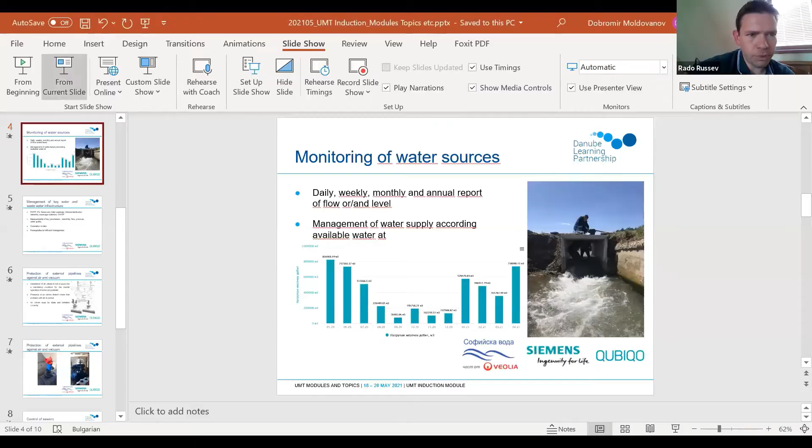As I said just 5 minutes ago, I will try to follow the initial agenda of the module. But what I want to add are several important topics which I believe should be deeply discussed in that module. The first of those subjects is monitoring of water sources.

What I started to explain as an example of why it is so important to monitor and control water sources is a fresh example from Bulgaria, district of Pernik. This is an area with about 100,000 people population, and last year we had a dramatic water regime there, with people threatened by complete water stoppage.

The only single reason for this is that the water operator did not control their water source in a smart way. I'm not saying that if the water operator controlled the water source more smartly, the water crisis wouldn't happen. What I'm saying is that they would control the crisis much better, and the people wouldn't suffer so much if the water operator controlled the source in a better way.

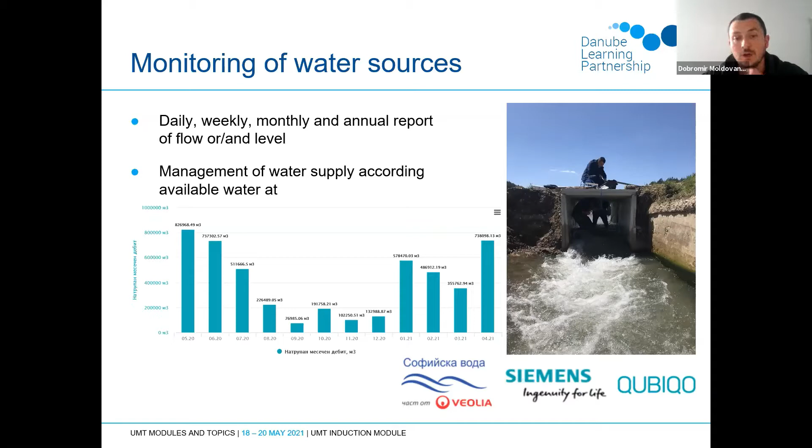Another subject which I would like to add to the agenda of the training program is what I call management of key water and wastewater infrastructure. What I would like to share with you here is that exploitation is not just opening and closing of valves and dealing with emergency repairs. Exploitation is provision of conditions for normal operation of the overall water supply and sewerage system and its equipment.

In that part of the training, I would like to share different good practices for management of potable water treatment plants, pumping stations, reservoirs, main pipelines, internal distribution systems and networks, sewerage collectors, and wastewater treatment plants. We will talk about different technologies for measuring key parameters like electricity, flow, pressure, and water quality, about correlation of different data and taking the biggest benefit from it, and about conditions needed for efficient network management.

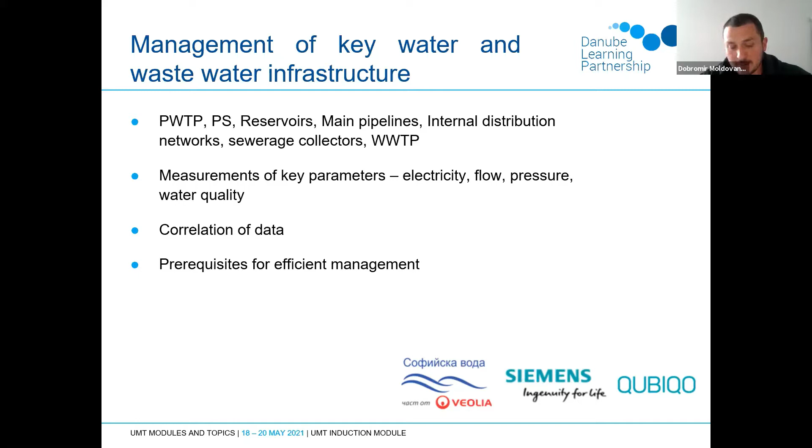Today I would just shortly talk about 2 of the subjects of this part of the training. Protection of external pipelines against air and vacuum. This is a completely underestimated subject in our region. Usually air valves are not serviced, are not selected correctly, and in total they are not installed correctly. Installation of air valves is not a luxury, but a mandatory condition for normal operation of external pipelines.

There are a lot of tools available from different producers for sizing and selecting places for installation, but no one talks about how to install air valves. Here in the picture on the right, I share with you short information developed by a professor here in Bulgaria on how to correctly install an air valve to guarantee enough space where air could be accumulated and afterwards released.

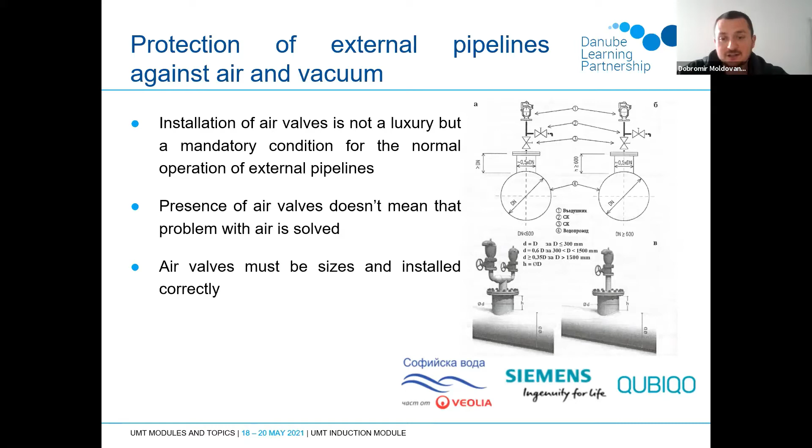What I'm trying to say is that, on one side, installation of air valves is obligatory, but on the other side, presence of an air valve doesn't mean the problem with air is solved. Air valve must be sized, and also must be installed correctly. And here I want to give a very nice example.

As part of that water crisis I was talking about earlier, our government decided to build a new pipeline from Sofia to that city which was suffering from water shortage, and I was the person responsible for pressure management of that pipeline. It comes for a DN600 pipeline with 190 meters difference in elevation.

What I'm trying to explain is that due to the improper installation of a small air valve, the system was not able to release all the pressure collected inside, and we were not able to start the DN500 pressure reducing valve for hours.

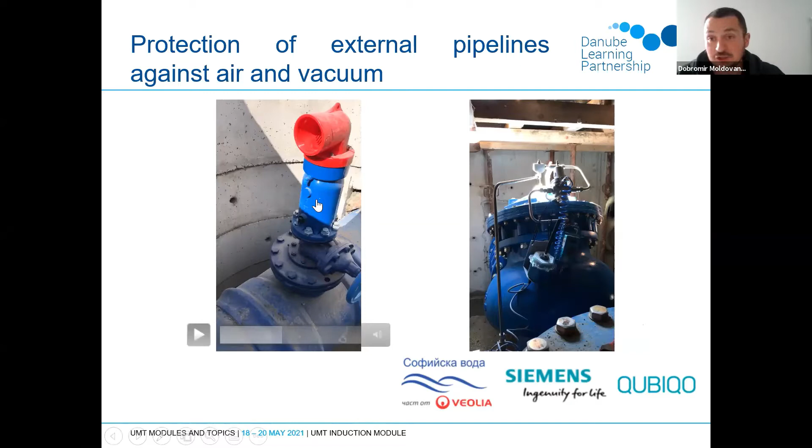This is a clear example of how something small, like an air valve — DN80 in this example — improper installation of something small can affect the overall functionality of 20 kilometers of external pipeline, with crucial importance for the water supply of the overall city.

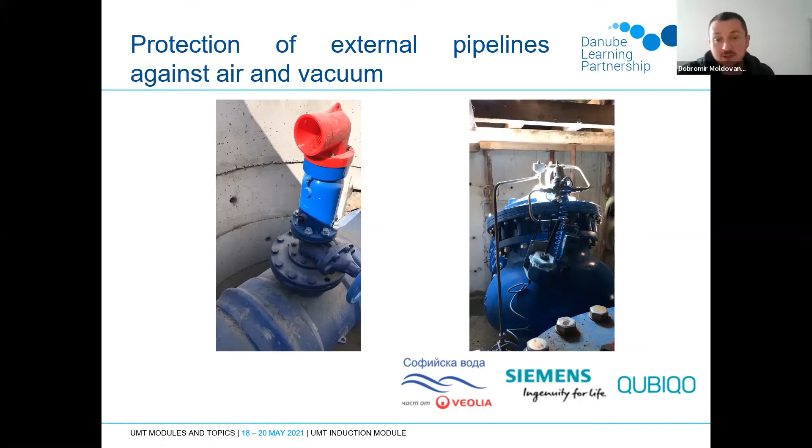We'll deeply discuss this subject during the training. I just wanted to give an example of such management of key water infrastructure. Another sub-subject of this topic is control of the sewage network.

This is something again underestimated. In our region, water operators behave as if they only have an obligation to serve the sewerage network, but at the same time, the sewerage network needs proactive maintenance in the same way as water supply networks do. In the long term, lack of proactive maintenance significantly increases the exploitation cost of wastewater treatment plants.

Two interesting subjects here: higher industrial load is not something bad if water operators are able to collect money from it and detect where it's coming from. And inflow and infiltration are not unsolved problems.

Lately, as a company, and me as a specialist, we are very active in using portable water quality samplers. We are installing this kind of equipment in the sewage network, and thanks to it, we are able to isolate sections of the network with suspicions of illegal discharge. This kind of equipment also gives us the opportunity to analyze infiltration based not only on flow measurements, but also on water quality in different time intervals.

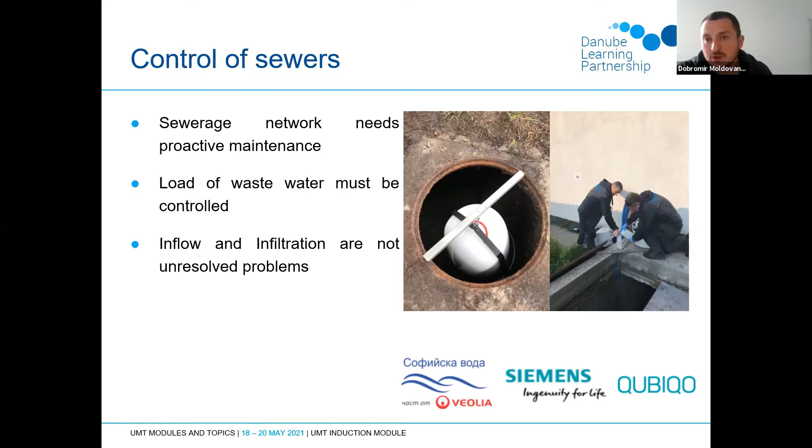And Rado, here I will stop. I just wanted to briefly present the additional subjects which I want to add to our module, and I hope that during the presentation of the overall module we'll have time to deeply discuss these problems with the participants.

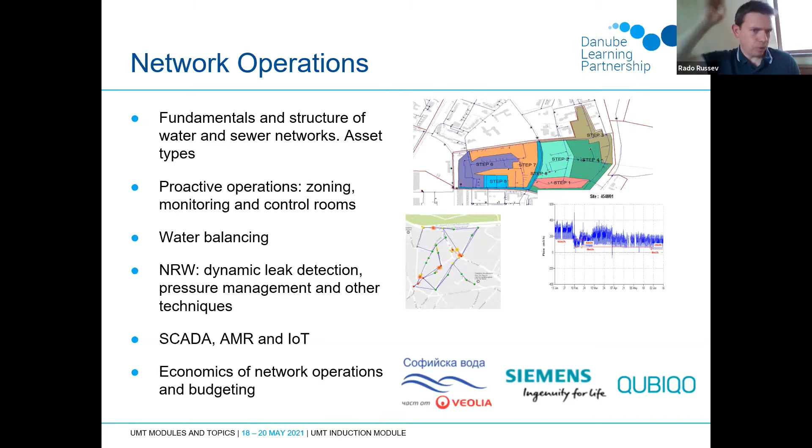What Dobry made is a very good illustration of how specific, rather technical and operational aspects can have a very deep effect on overall performance. So that's how technical topics become management issues. And this is pretty much the philosophy of our program.

Yesterday, I spent some time outlining to all of you that we are targeting a wide spectrum of topics, and only where necessary will we explore certain aspects in more detail. Dobry and Qubiqo just demonstrated an example of such topics.

We have quite a few financial people, economists, and lawyers among our participants. I hope they don't get lost on some of the slides. But pretty much that's the concept: to make sure that people with non-technical backgrounds also get exposed to the criticalities of network operations.

During this module, which will come in the beginning of 2022 — this will be the 4th module in the program — as we said yesterday, we will first cover topics like asset management and financial management, because certain key concepts will then be utilized in the rather technical modules.

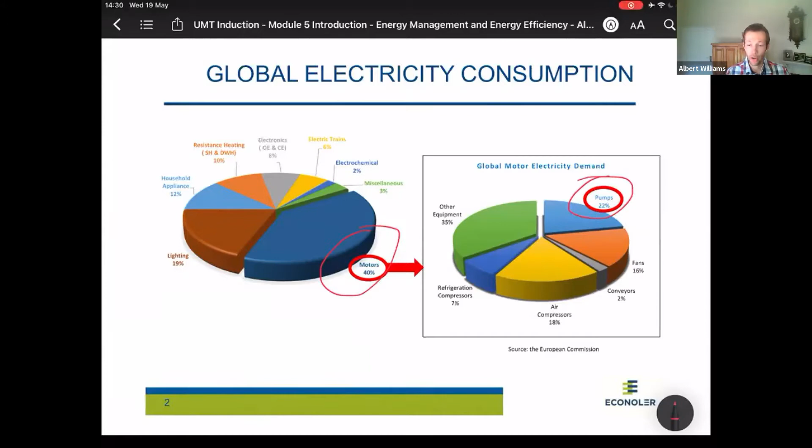To give you an overview, globally electricity is consumed across these areas. Electric motors account for 40% of all global electricity consumption. If you divide that into end-use equipment, pumps sit at 22% of that 40%. In comparison with compressed air, refrigeration compressors, conveyors and hoists, pumps are really the largest consumer of all these equipment types. That's where we will focus in this energy management water utility module.

There are some more numbers showing global energy consumption, global electricity supply, and industrial electricity supply. Motors consume two-thirds of all industrial electricity, and pumps, as on the previous slide, account for 22% of that. So we're sitting with a massive amount: 1,200 terawatt hours per year globally, which at about 10 euro cents per kilowatt hour means we are investing 150 billion euros per year in operating pumps. That's the electricity cost to operate pumps.

There was also another study mentioning that if you go into the average facility, you can save 26% in a financially feasible manner. If we apply that 26% savings on pumps across all industries, we can access 39 billion euros. So there's a lot of money available, and a lot of savings available.

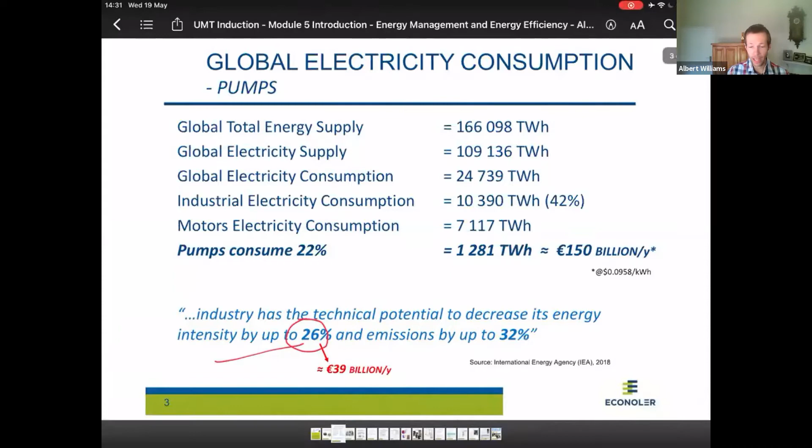So how are we going to get this money? How are we going to achieve these savings? In this module, we're going to discuss the systems approach. We're not only looking at pumps, we're looking at the entire pump system, which includes the motor driving the pump. If you look at an average motor, you might get 91% efficiency, but there's also a drive, like a variable speed drive, driving this motor.

The pump has varying ranges of efficiency, ranging between 0 and 85%, depending on how it's operated. If you only improve the motor or only the pump efficiency, you have very limited savings, maybe 3 or 5% efficiency improvement.

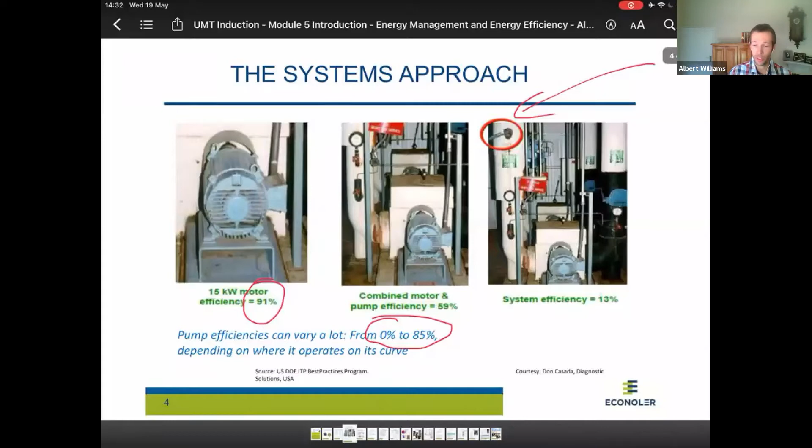But we are looking at the entire system: the piping, the distribution network, how the water is consumed, control valves, and bypass control. We are considering everything involved in pumping water from one side to the other. When you address system efficiency, that's where we get massive savings, 26% or more. I'll show you some case studies at the end where we save 40%, up to 70% savings, using this system approach.

Another way to look at the systems approach: in this example, the pump has an efficiency of 77%. We've got a motor, a drive or transmission, but here we're sitting with a control valve, and we are losing a lot of energy in that control valve.

In this top picture, we are getting a system efficiency where we're only getting 31 units out for every 100 units we're putting in. So we have a system efficiency of 31%.

Now, if we take a systems approach and take out that throttle valve, and look at how the pump is operating to only supply what is required, we can actually improve the system efficiency to 72% from 31%. It's more than double the savings.

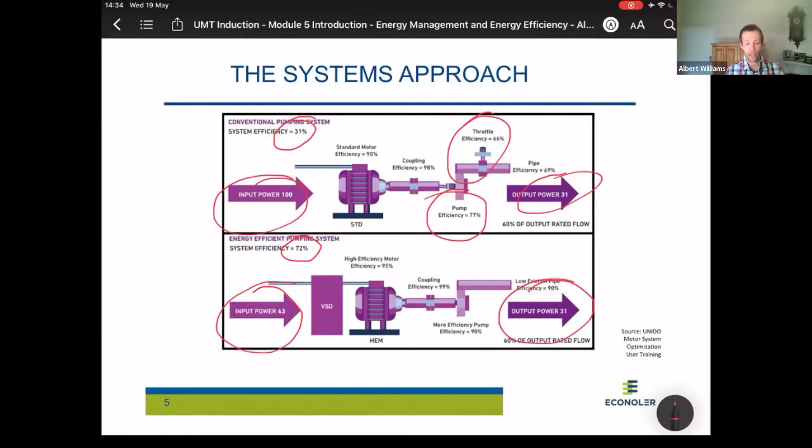So we're still getting 31 units out, but our input energy goes from 100 units down to 63 units. We need a lot less electricity to run an optimized system, and that energy that's been made available can now be used for other things. It's a virtual power station - you've created a virtual power station, and we can use this freed energy to basically improve the economy.

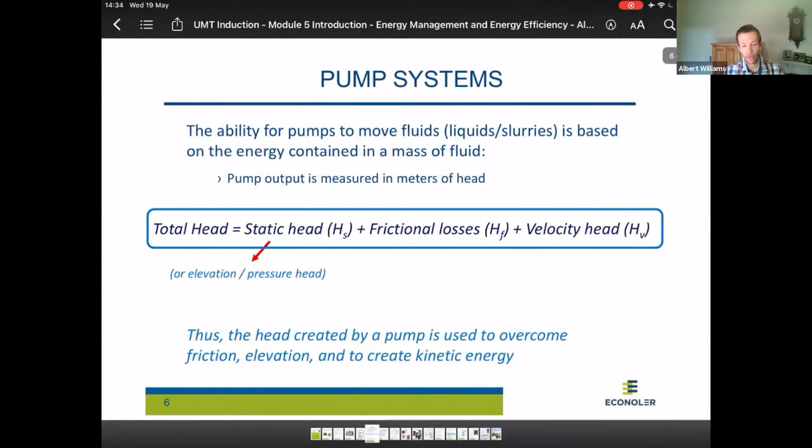With regards to the technical aspects of pump systems, we're not going to discuss this too much now, but pumps are used to move liquids or slurries in some aspects. There's three things that are important here, and we'll discuss this in the module: static head, friction head, and velocity head also, but static and frictional head or losses - that's the most important aspect.

We're going to spend a lot of time in the training course to determine these things - how does it work for your specific situation, how much static head and frictional head do you have in your system? So a pump is basically a machine that is used to overcome these losses.

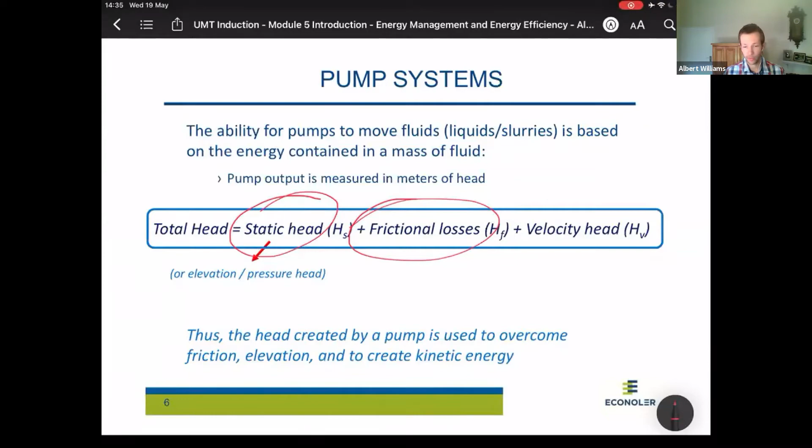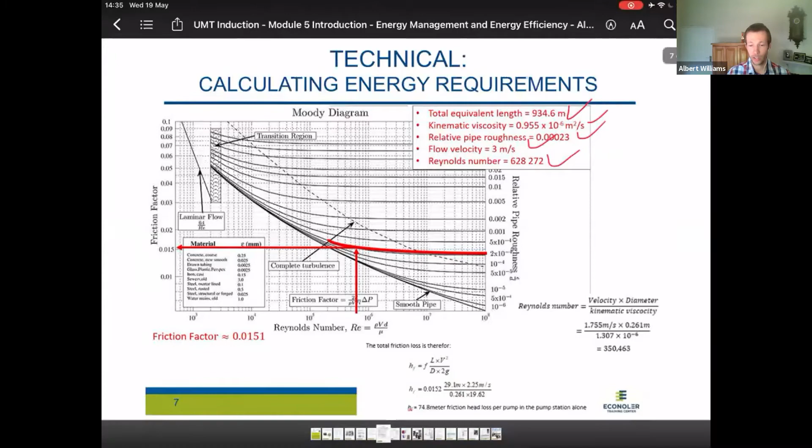It's not so that it looks complicated now, but if we go through it step by step in a sequential way, it's actually quite nice to see how much energy you are losing in your system and how to overcome those losses. We use that energy, that head requirement, and then we take that to a performance curve.

Now these pumps have performance curves, and there's also a system curve. We're going to use that head requirement to draw a system curve. Basically, we use this information to understand where the pump is operating and what we can do about that operating point - can we change that in a more efficient way?

And a lot of the time, it's a very cheap saving. Sometimes it's a zero investment cost to improve a pump's efficiency or a pump's system efficiency.

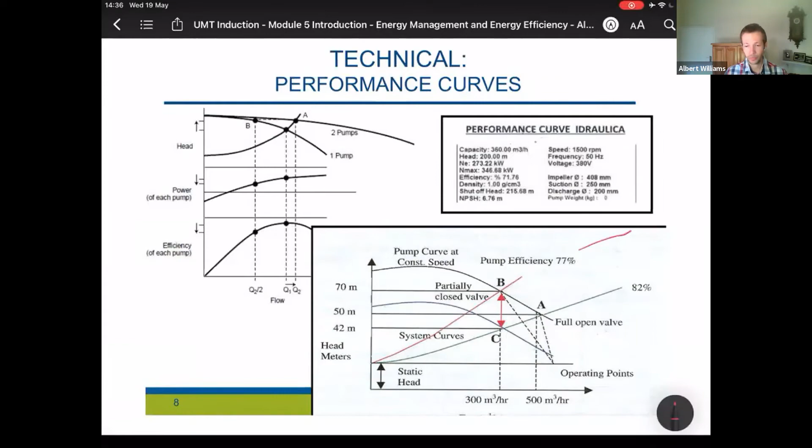In addition to energy and energy savings, we also look at maintenance, because maintenance and energy are very much interlinked. If your pump is operating incorrectly, you get all sorts of problems with these impellers. We call this cavitation, which is very common. Now, what is causing cavitation? How can we solve this?

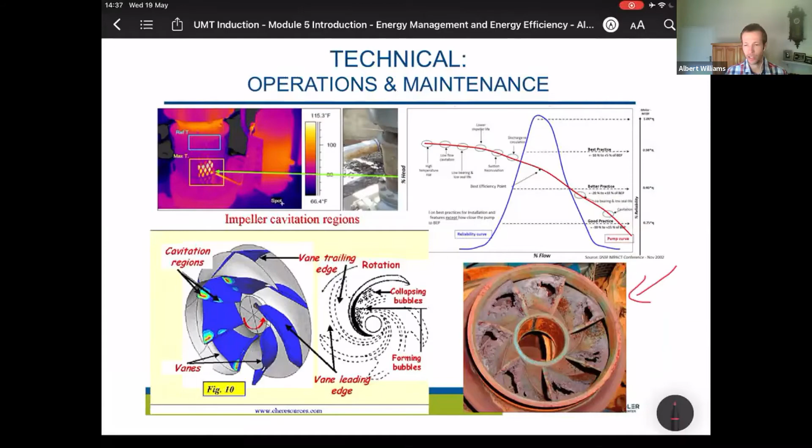Things like your shaft alignment - we're going to look at that. Your bearings, heat, and how that has an influence on your motor. We are trying to keep the pump operating in a certain efficient way so that we do not have these maintenance aspects or these breakages that happen. That is a big headache in most pump systems.

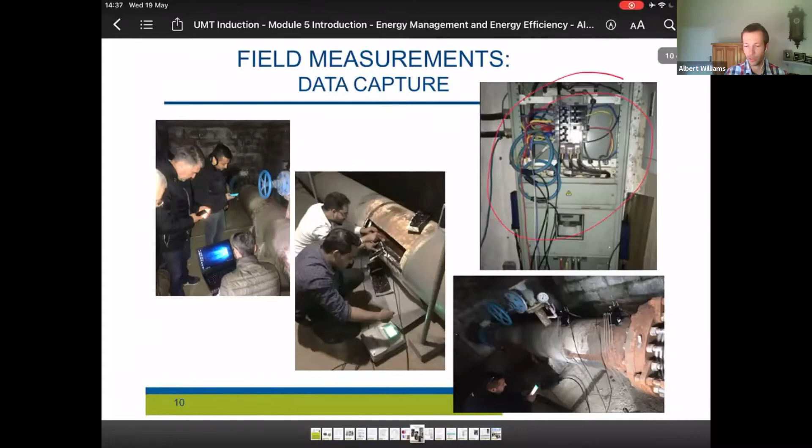So we use all of these parameters to determine what is the kilowatt requirement of this pump and what is the system requirement of this pump. So we need to have data so that we understand what's happening and how to improve the system. It's quite a fun exercise to go out in the facility.

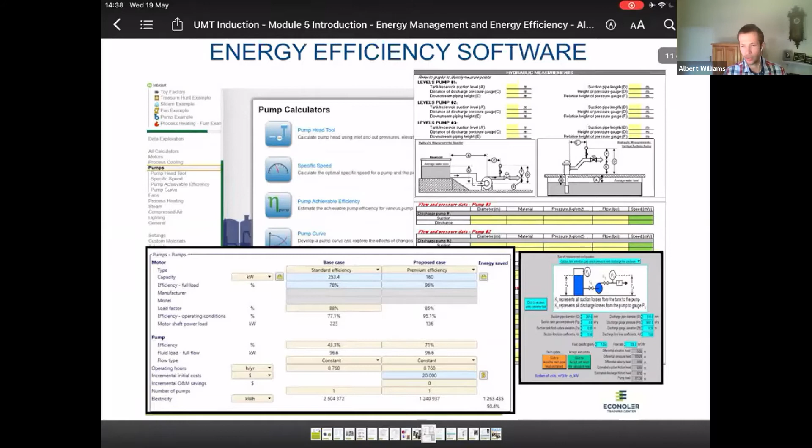We then take all of this information and put it into some software tools, and there's various types of tools. We're going to probably use RETScreen, and go into some detail there. There's also other tools like MEASUR, which is free software to a certain extent. We're going to plug it in with the data we captured on the facility, and the software will assist us to quantify the possible opportunities, how much money we can save, and how we can improve the system.

Just to close off, quickly going through some case studies. We don't have a lot of time to go through everything, but just 3 case studies where I was personally involved. The first one is in Egypt - they had some nicely sized pumps there.

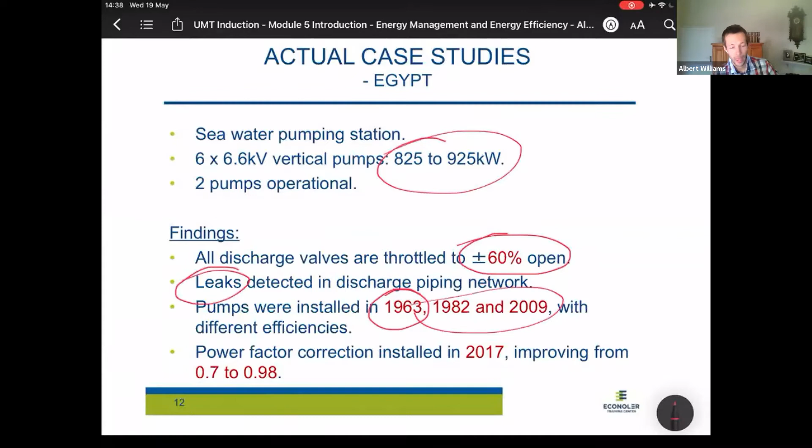We found that the control valve was 40% closed, 60% open. We found some leaks in the system, and these pumps were very old, 50 to 60 years old. So we looked at these things, improved those situations, and at the end of the day, we determined the amount of water required by the system and supplied only that requirement in the most efficient way. In this facility, 3.4 gigawatt hours per year, or 121,000 euros of savings was achievable.

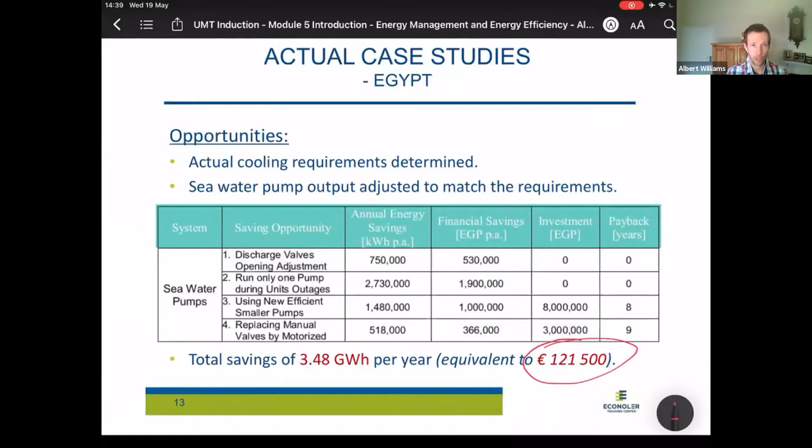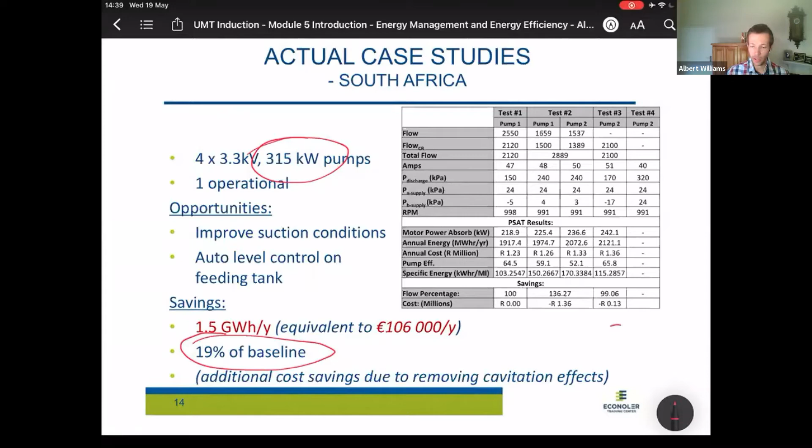Another case was from South Africa, where we looked at 315 kilowatt pumps. Only one pump was operational. We looked at the suction conditions of this pump, how to improve that, looking at the piping and the suction or feeding tank. We saved 19% by doing very low cost interventions, saving 100,000 euros on one relatively small pump. We also improved the maintenance by getting rid of cavitation effects.

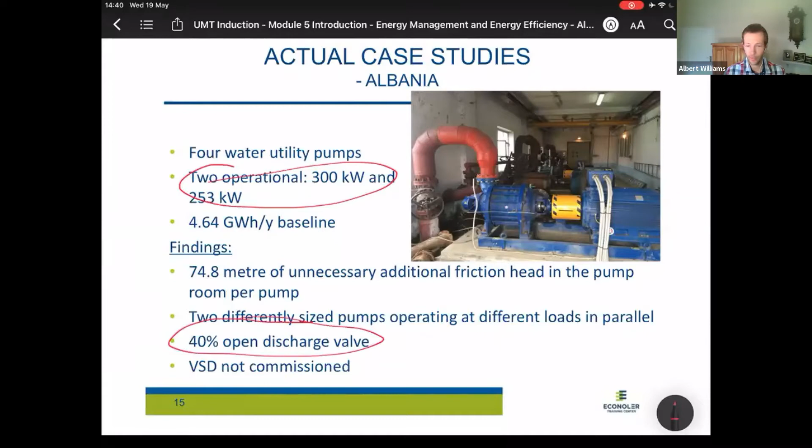The last case was from Albania, where we had 4 pumps, only 2 operational, about 300 kilowatts, 4 gigawatt hours per year baseline. We looked at what's happening inside the pump room and found all sorts of restrictions and losses. We looked at how the pumps are controlled, and found once again a discharge valve that was relatively closed, and a variable speed drive that was not used properly. By reconfiguring these things, upgrading the motor to a more efficient one, and managing the leakages, we were able to save 42% of the energy, at a cost saving of 240,000 dollars. It's an extremely attractive project — the simple payback in this case was only 0.1 year.

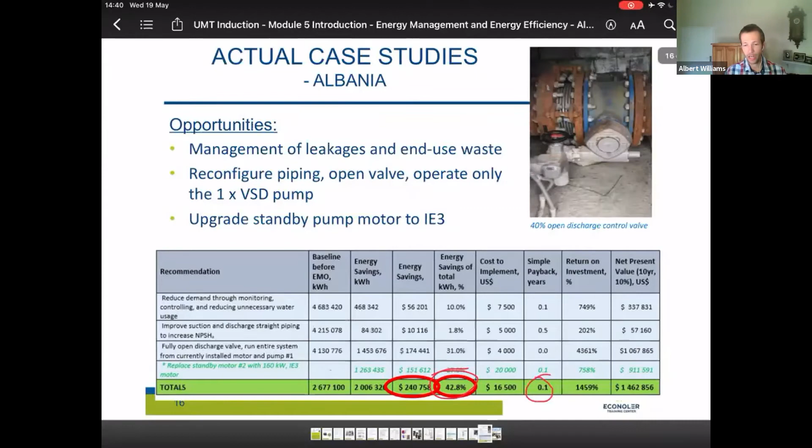So most of the time, as I've said, investments are very low cost and very easy to achieve. I'm looking forward to these modules, we're going to go into a lot of detail, and yes, I hope to see you soon in person. I think you're going to enjoy this module.

Okay, thank you Radu. Albert: Not so soon, to be honest, it's scheduled for next year, but at least some preparatory webinars, we can see each other. Thanks a lot.

I would, in addition to the technical and operational side of things which you just presented, like to give the floor for a brief intro from Christopher from the World Bank, so he can provide a different perspective on this high priority topic of energy efficiency. So the floor is yours, Chris, for a short intro.

Thank you so much, Rado, and thank you for giving me the opportunity. This was a very intriguing presentation for me. I am a senior water and sanitation specialist with the World Bank. I've spent about 10 years in Africa on rural water supply, and the last 5 years I've been in Washington. I'm the coordinator for energy efficiency in the water sector in the World Bank, which sounds very glamorous maybe, but it's not, because it's a completely overlooked area. Nobody has been paying attention to it, haven't gotten any budget for it. Our various lending programs in many countries have not paid much attention to energy efficiency. But recently, with all this talk about the Paris Agreement, the US signing on to it, and more focus on mitigation, I think over just the last couple of months there's been a huge fluctuation in interest in energy efficiency.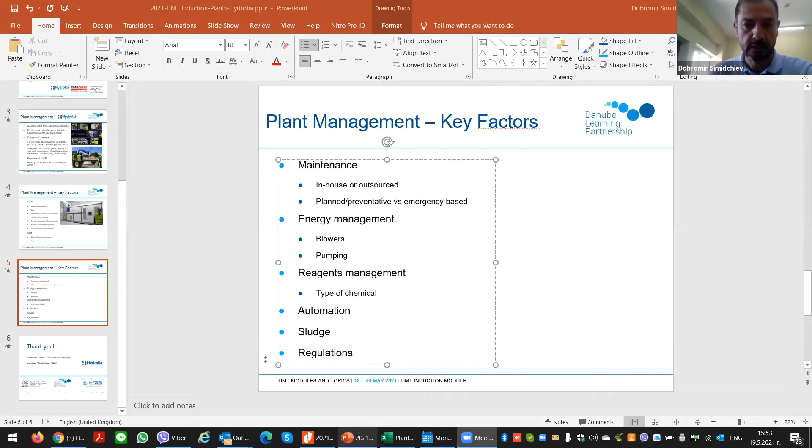Now, we've put together a presentation, which I'm going to share now. Is it working? Yes, go ahead. Great. So we use the master slides of the entire event presentation. So this is the module that we are going to talk about, plant management. This is the original slide from your presentation, Rado.

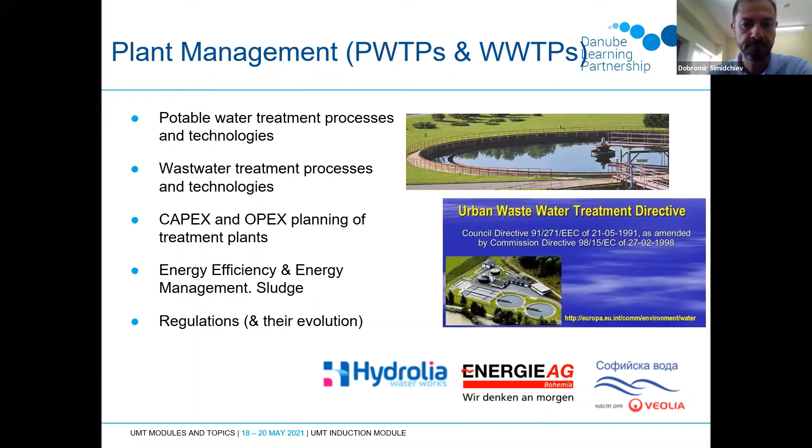Now, probably it's worth mentioning a few words about us, and I guess you'll give some sort of answer why we are taking part in this whole thing. So we are a Bulgarian operation and maintenance company, but also engineering company, which means we are implementing engineering projects. We are focused primarily, if not exclusively, on the industrial sector. But our entire professional background basically was in the municipal sector, so we know both sectors now quite well.

We have full national coverage, as we were joking some hour and a half ago, three of us, although in Bulgaria, we basically are in three different parts of the country as we speak. Actually, more than 50% of our revenues are generated from operations of mostly wastewater treatment plants. So this is our core business anyway.

So I mean, we are more than happy to share part of the experience that we gained throughout the years in the forthcoming modules. Our approach is we would like to be as comprehensive and long-term as possible. And I think it is, because we have more and more projects where we start from basically defining the problem, going through feasibility studies, design, installation and construction, commissioning process, and then operations.

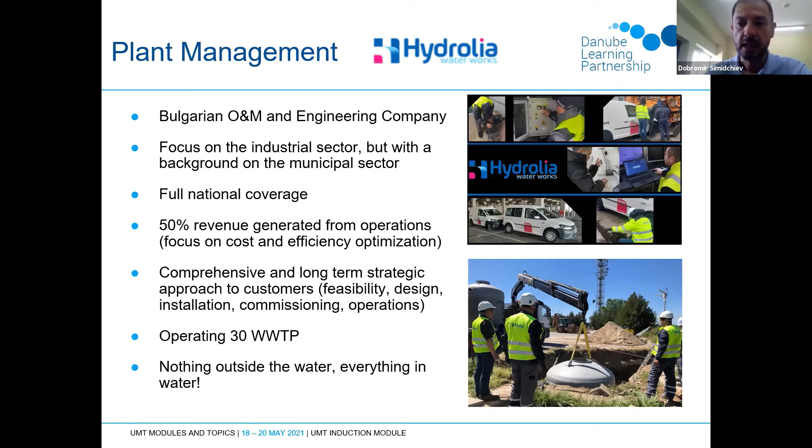Now, as I said, it'll be really challenging to squeeze everything about plants, especially having in mind that we are talking about both potable and wastewater treatment plants, but still we'll try to do that at a very high strategic level of detail. Now, first of all, what is key here is to identify what type of a plant it is. Water or wastewater, this is quite clear. The size matters a lot. Different sizes of plants require different mode of operations, different mode of maintenance, different mode of attitude as a whole.

Whether it is treating industrial or domestic wastewaters or combined, this is rather different, not only because of different technologies, but also the different profile of both quantity and quality of the wastewaters. Normally, industrial wastewater treatment plants are characterized with very unlogical, sometimes very big fluctuations in both quantity and quality. This is not the case for domestic, so a different approach is needed here.

Here I would pass the floor to Rado, who would give his contribution on these key elements. Hi everyone, my name is Rado Zlatkov, and thank you Dobry, I will go through the key factors which we always find every day in our work. As Dobry said, from the CAPEX and OPEX perspective, it's really related to the key factors, which are the next couple of bullets. The first bullet is maintenance, because maintenance is, as you said, to keep it running and to not have emergency stops.

And this can also cause some issue with the outlet of the wastewater treatment or the treatment of the water itself. So planned versus emergency based - this is always a really big challenge for utilities, to have planned maintenance. I mean, to have regular checks of the pumps, air blowers, and to make sure that they are changing oils, filters, and so on at the right time, to not have emergency stops.

This will go into deep details about the planned and emergency maintenance. Also, in-house or to be outsourced - what we found is it depends on the size of the utility. Probably this is the best thing to discuss here. If the utility is too small, it could look at the opportunity to outsource to some other company which can do the maintenance, because the utility doesn't have the experience and also the knowledge to maintain all the equipment inside the wastewater or water treatment plant.

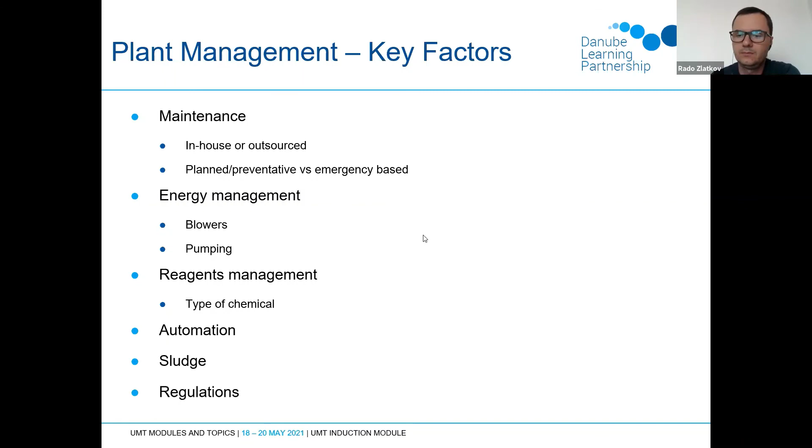And of course, regulation, which is different in different countries, but it's important to discuss some of the main regulations, like for the European Union and for Bulgaria, but probably we can discuss also for the Balkans, where it's important to go into detail. I passed through, Dobri, I think that's it. I'll stop the share now.

So this is basically what we wanted to mention, to outline the key issues which you may bump into during plant operation. We will be speaking about that in detail when the training takes place. Thank you very much, guys.

Appreciate it. I'm sure that quite a few of our trainers and participants know you and you know them, although probably you don't see them.

But two quick comments I want to make before we conclude. One is that, as with all the other modules, plant management is a good illustration of how an important topic has many overlaps with other modules, most logically with asset management and finance. Treatment plants, both potable water and wastewater treatment plants, are a very good example of cost centers. They are physically separate, they are a plant by themselves, they have a very conventional, very generic cost structure: staff, chemicals, energy, outsourced works, etc.